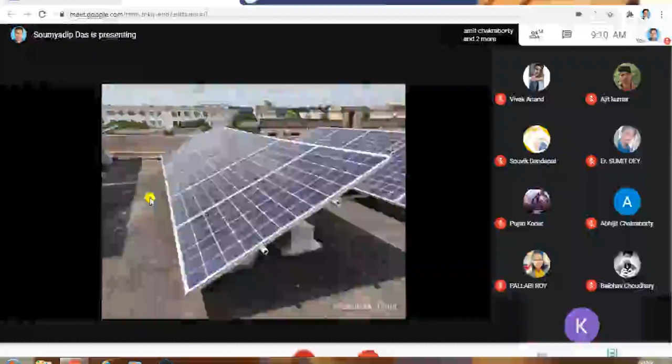After this there are some kind of connections required for that.

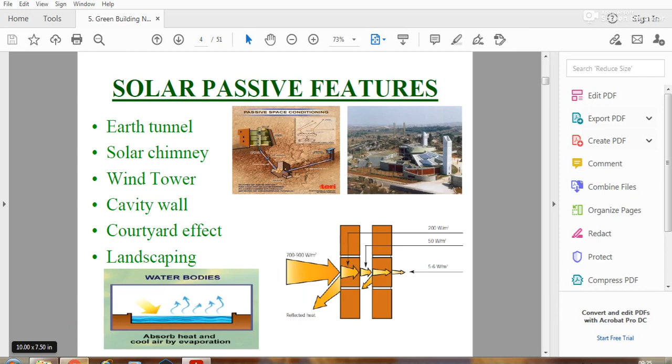So definitely, green building is a very important area where this kind of solution is actually required.

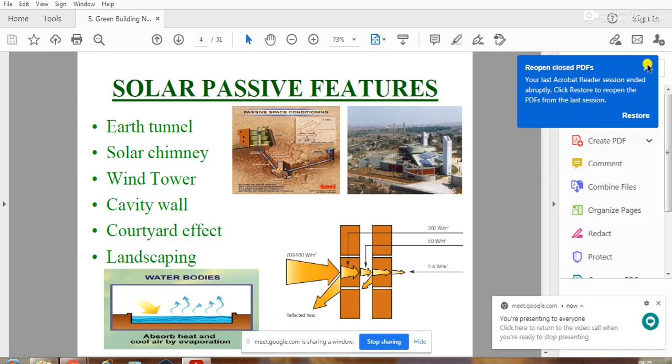Let me share the screen. So here it is, I hope you can see this screen where the solar passive features are written. It's a very important thing in terms of understanding solar heat propagation.

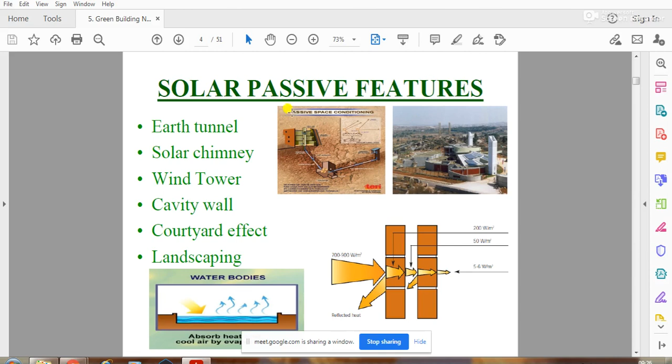Now, what actually happens in case of the hollow brick? Let me increase the size of it. So what happens with hollow bricks at the first place: this is the outside of the building, where I'm hovering the mouse, and this is the inside of your room, where all the numbers are written.

So generally, at the first place, the solar energy comes directly onto the walls which are outside. When it reaches the wall, it has an energy amount of 700 to 900 watts per meter square. This is the amount of heat that is coming.

Now, after a while, what happens? Some amount of that energy will be reflected back, shown here as the reflected heat, and some amount will go inside through the wall. This wall will try to let it go inside.

Now, what if we use hollow brick in the construction? In that case, the wall allows only a small percentage of the heat to go inside. Comparing to the 700 to 900 watts per meter square outside, what comes inside is given as 200 watts per meter square. So only this amount goes inside.

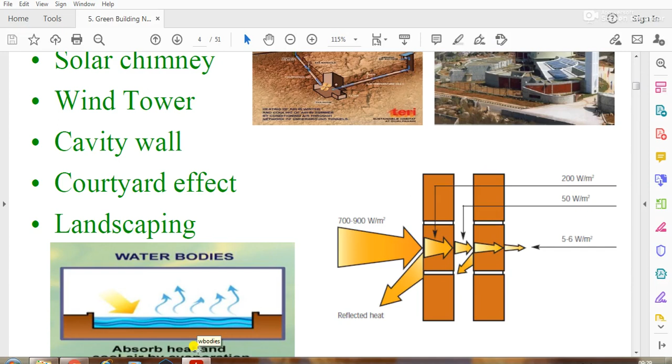Now, other than that, there are a few more things in green building, like the rating system. We have heard about the LEED rating, that is Leadership in Energy and Environmental Design. If you go for the different LEED ratings, buildings are given some rating, similar to the 3-star, 5-star ratings we've heard for hotels.

We also have rating systems for electrical appliances, like 3-star, 5-star refrigerators and ACs, which are generally available in our daily life. Now for green buildings, we also have different rating systems for different buildings.

The rating system is based on the next five things to be discussed: first is sustainable site development, then water savings, then energy efficiency, material selection, and indoor environmental quality. These are the five key areas to consider before going for the different kind of certification.

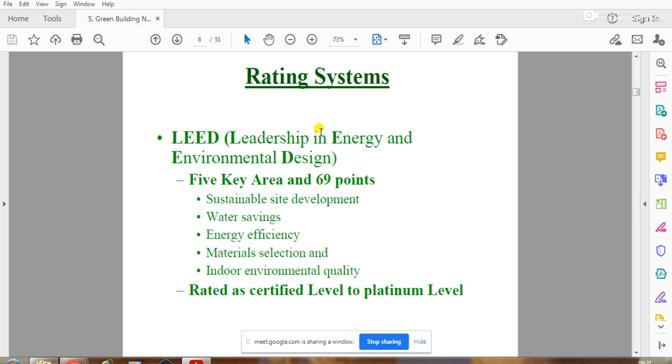So this is your LEED, Leadership in Energy and Environmental Design. We need to keep track of the following things when we are thinking about the rating system of a building.

If we have different ranges of values, we can have different certification levels. There are possibly 69 marks that buildings can have as per the current requirement. If a building has points between 26 to 32, it will be only LEED certified. But if it has higher values, it will be certified as silver, gold or platinum level.

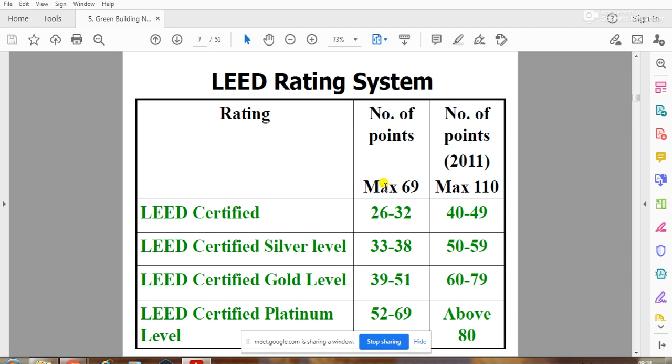Then another agency is there which has a rating system, it is the Energy and Resources Institute, that is TERI. Compared to LEED, which had 5 key areas, they also have 3 key areas, but remember that most of them are actually interrelated.

The first one is site selection and planning, then building planning and construction, and the third one is building operation and maintenance.

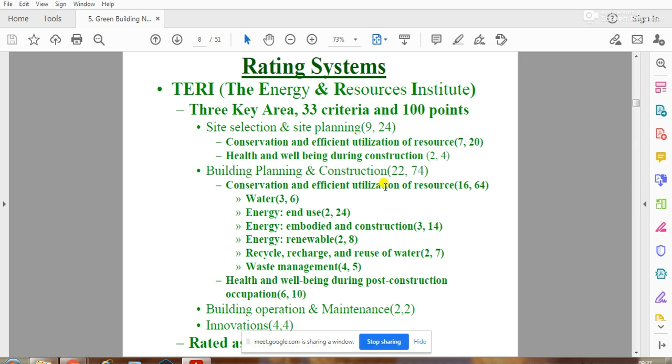So due to that particular reason, we need to think about this point with some kind of emphasis. Now what is actually happening is that if we go for the different kind of rating system, obviously we should be having some kind of buildings which have been already certified.

Through the next few classes, we'll go for the detailed discussion of all these kinds of buildings. So there are a few buildings, like your Sohrabji Godrej Green Business Center in Hyderabad. It is a certified green building, and this certified green building is a model green building.

Also, other than that, there is our ITC tower in Gurgaon. Then there is the BSGES building in IIT Kanpur. All these buildings are having that kind of certification which could be called green building certification.

Now, when we are talking about the construction of the building, we have already understood what should be used at the time of construction, that is the hollow bricks. The problem lies with the fact that hollow bricks have a higher price when they are actually purchased. For example, one conventional brick comes at the price of 15 rupees per piece, but the hollow brick could be having the price of 50 rupees per piece.

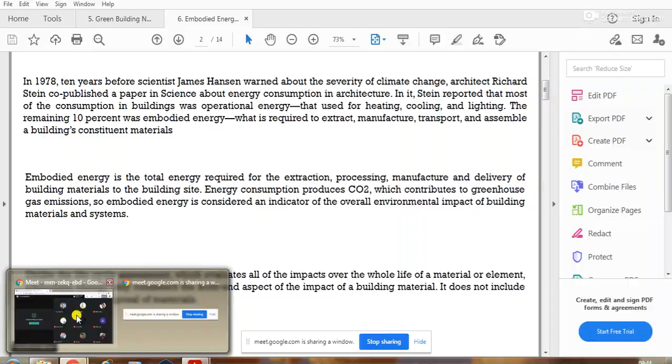Now, when a building is being constructed, some amount of energy is also used. This means that for construction, we need materials that we bring from somewhere else, and those materials need to be transported, and sometimes manufactured. Because of this, we get many things that we need. The energy used for this transportation and manufacturing is called embodied energy. This embodied energy needs to be taken care of at the same time as when the building is actually being constructed.

Embodied energy has to be calculated considering different sources, like transportation. If we are transporting material from a long distance, what we need to do is use things which are locally available. To reduce the value of embodied energy, we can use locally available material. Then we can go for different kinds of things which are generally available in daily life.

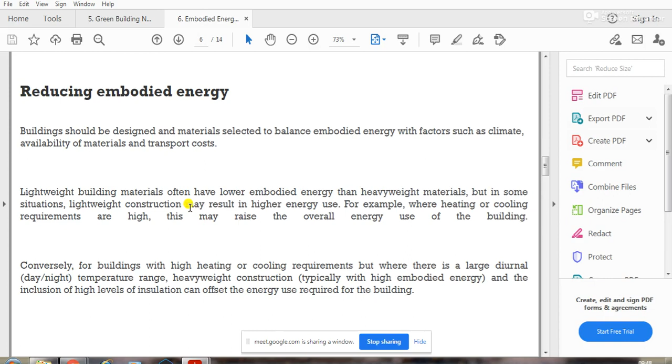Now, when selecting materials, we need to take care of the following points: the embodied energy of building materials should be considered with respect to durability, how easily materials can be separated, use of locally available materials, then recycled materials. Waste generation is a very big issue and we should think about using waste materials in our daily life. Then avoiding waste, and another way of getting rid of waste is reducing the amount, and selecting materials that are manufactured using renewable energy sources.

As we said about our Vidyasagar Bhavan building, in the roof, at the very beginning of the class, we showed you that solar panels are actually available here. We have installed some solar panels which will give us solar energy, and we can convert that solar energy into electrical energy so that we can use that particular energy for our lighting purpose.

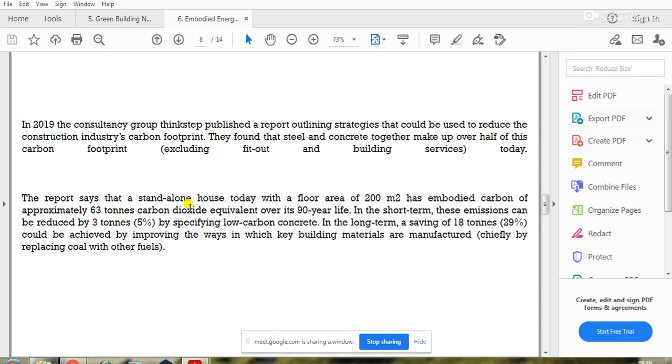Related to this topic, we need to understand the different kinds of greenhouse gas emissions. The chlorofluorocarbons are there, some carbon dioxide are there. All these things lead to the problem caused by the increase in temperature. In order to work on it, we need to think about the carbon footprint, which is very much related to environmental sustainability. We have discussed it somewhat till now, but I will discuss it more in our next class. Therefore, design professionals and consultants, who are very important nowadays, constantly look for different kinds of solutions to make the environment safer.

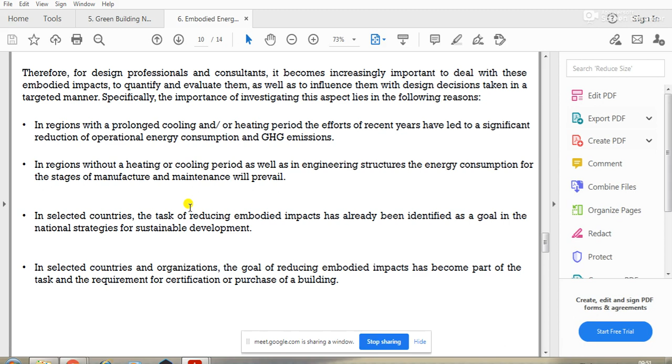In regions with prolonged cooling and heating periods, the efforts of recent years have led to a significant reduction of operational energy consumption. In selected countries, the task of reducing embodied impacts has already been identified as a goal in national strategies. In selected countries and organizations, the goal of reducing embodied impacts has become part of the requirement for certification or purchase of a building. When awareness of the people is built, they will go for these kinds of buildings, or be aware of what embodied energy is and how this amount of energy could be reduced. For that purpose, there is the role of design professionals and consultants in the information and supply chain.